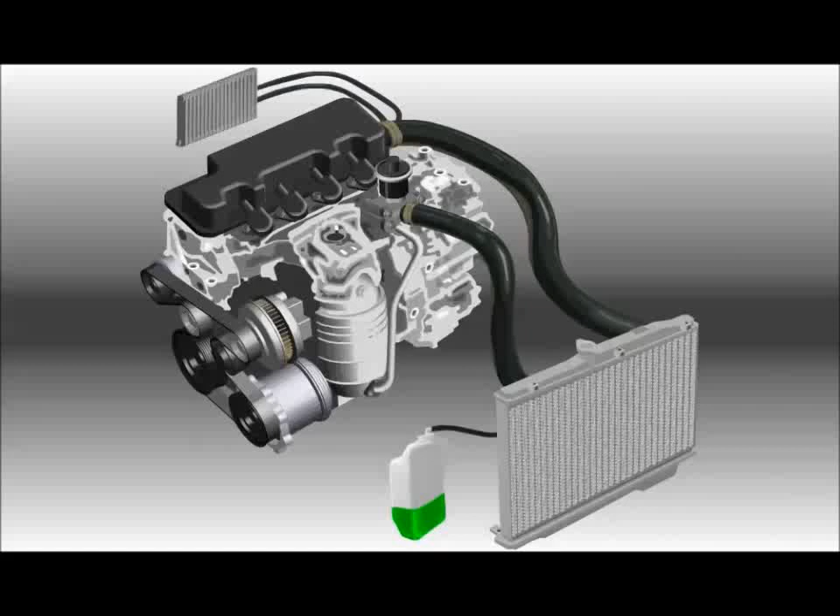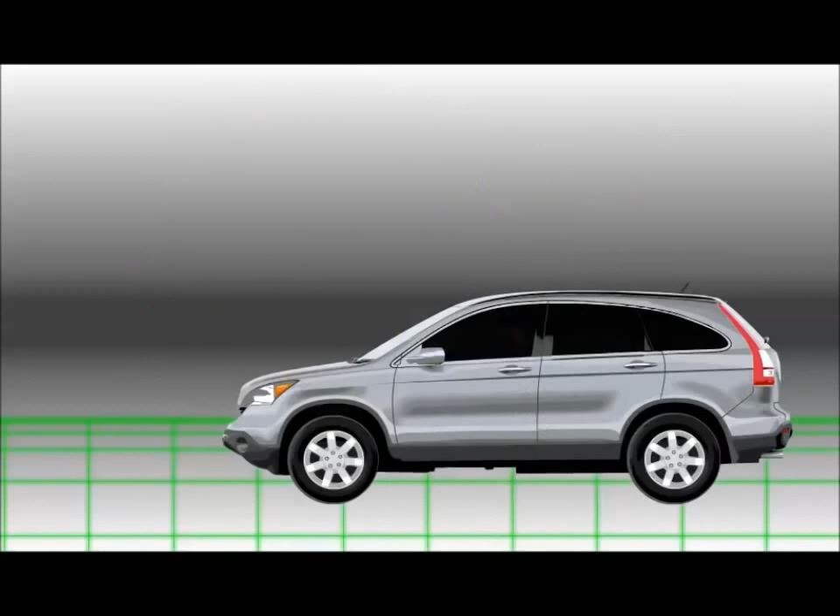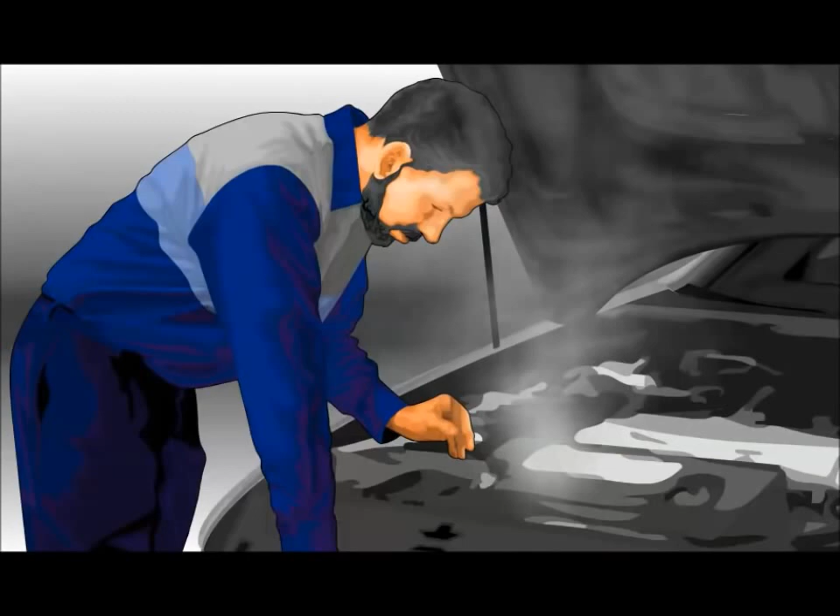A vehicle cooling system removes excess heat from the engine. The system transfers heat from the engine into the vehicle interior or the atmosphere using heat exchangers called radiators. To perform its job, the cooling system must cool the engine enough to prevent damage, while keeping the engine warm enough for efficient operation. In addition, the cooling system must work in all operating conditions, adjusting to changes in engine load, vehicle speed, and outside temperatures. Finally, the cooling system must contain increased pressures created by engine heat.

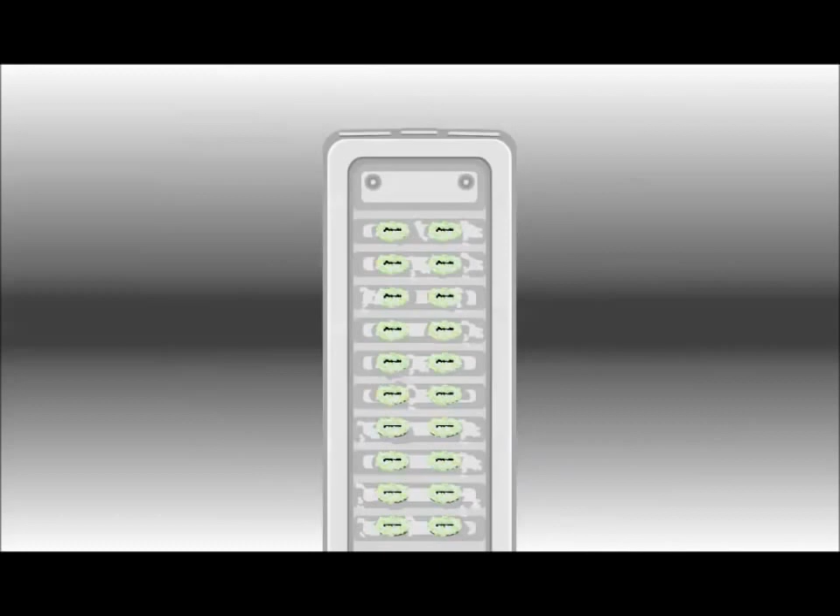The cooling system must carry heat from inside the engine to the atmosphere. The system uses a liquid called coolant to accomplish this. While our coolant contains some water, pure water makes a very poor coolant. Pure water allows damaging corrosion inside the cooling system, boils at a relatively low temperature, freezes easily, and has poor lubricating properties. To solve these problems, chemicals are mixed with water to provide the needed properties. Honda or Acura coolant prevents corrosion, lubricates the water pump seal, increases the boiling point, and lowers the freezing point.

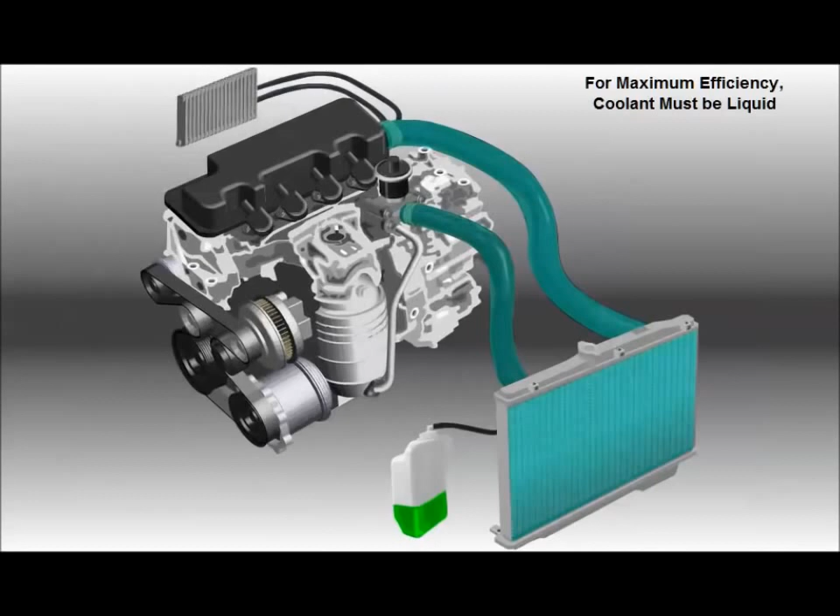Coolant can only transfer heat efficiently when liquid. If coolant boils into a vapor, cooling efficiency drops dramatically. Because of this, the cooling system operates under higher pressure to increase coolant's boiling point, maintaining cooling efficiency.

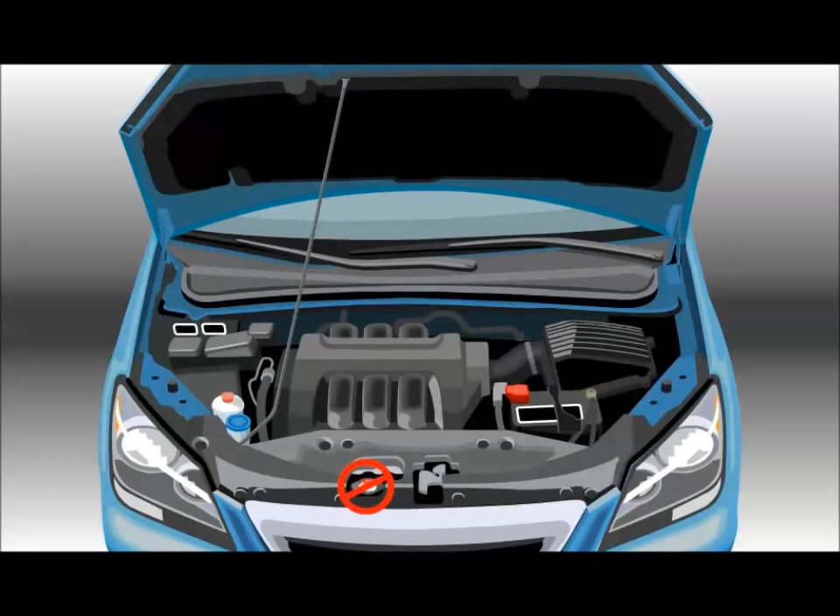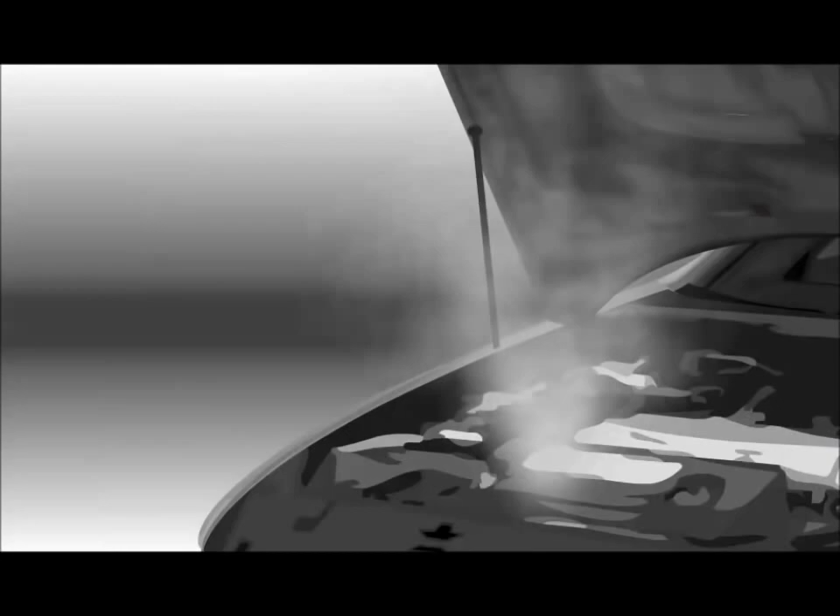Because the cooling system contains heat and pressure, do not remove the radiator cap when the cooling system is hot. Removing the cap releases system pressure. At a lower pressure, the superheated coolant flashes immediately to steam, scalding anyone in the vicinity. In addition, coolant can be a toxic substance if ingested in large enough amounts.

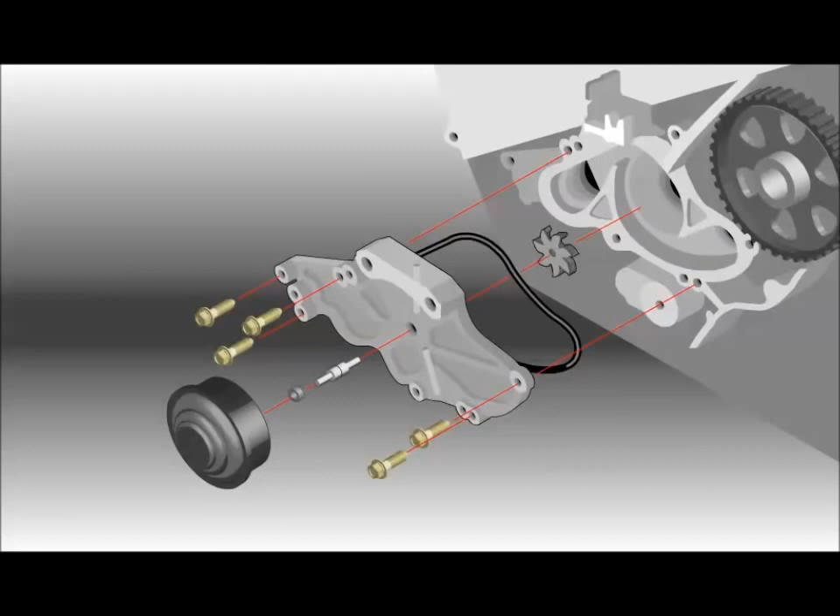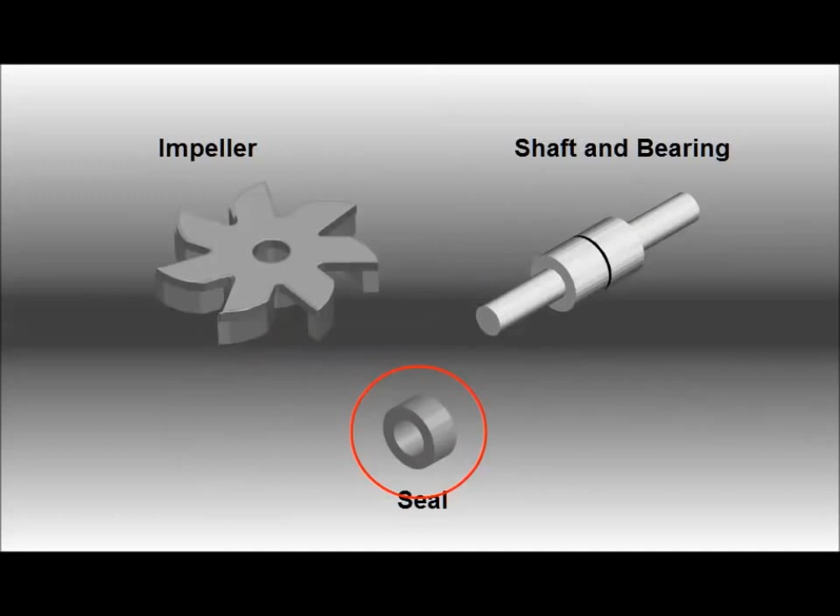Water pump uses an engine-driven impeller to draw water from the radiator and pump it into the engine water jacket. This pump may be driven by an accessory drive belt or by the camshaft timing belt. The pump includes a shaft seal between the impeller and the shaft bearings. During normal operation, this seal may allow small amounts of coolant to leak past, which can drip out of passages in the water pump housing called weep holes. This hole may normally contain a few drops, but if the pump seal fails, a steady stream of coolant flows out.

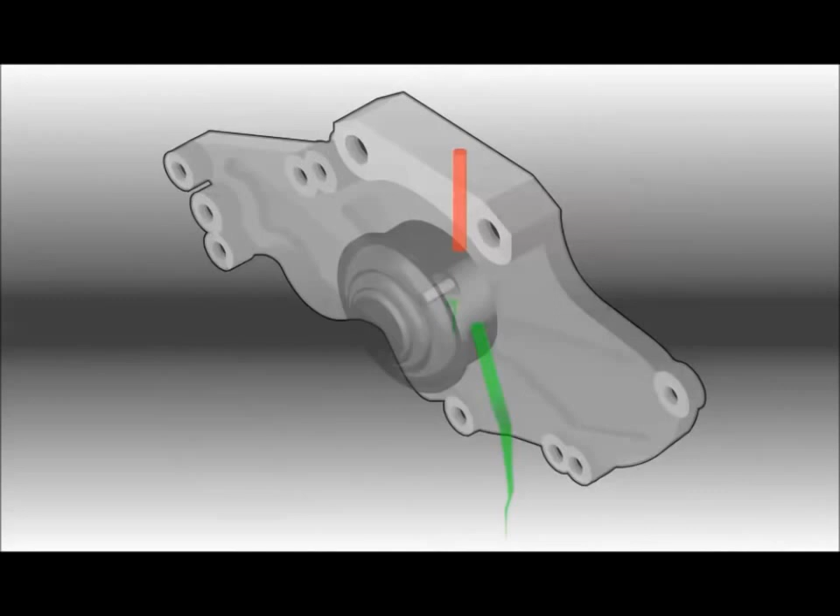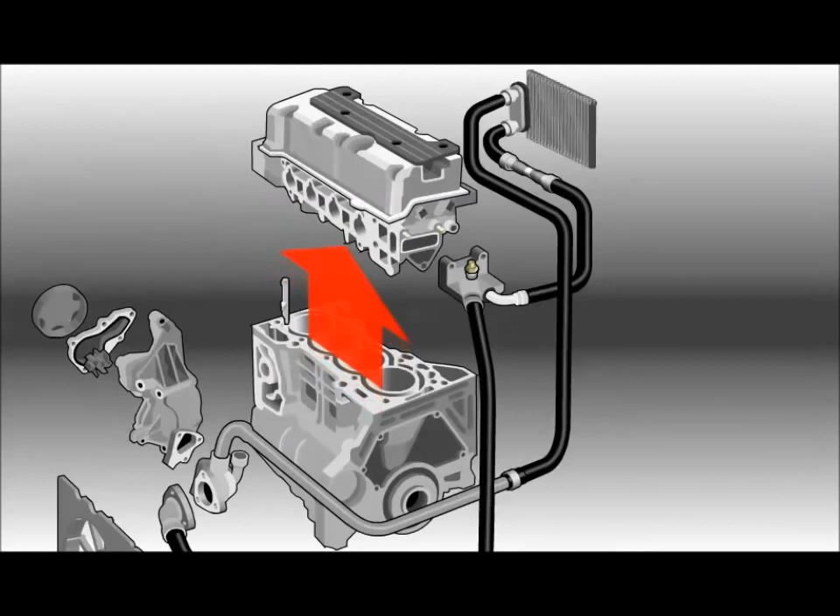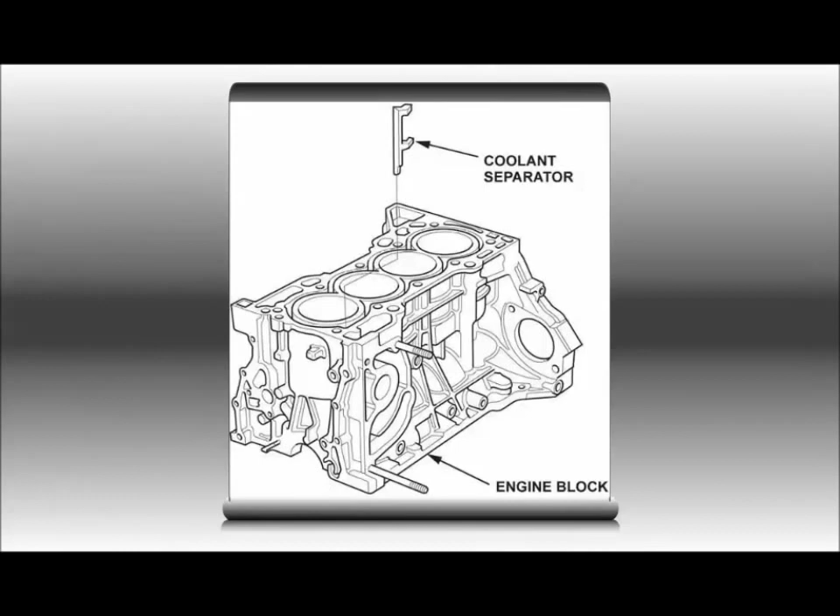Inside the engine, the water pump sends coolant into the space between the cylinder walls and engine block called the water jacket. As the coolant moves through the engine, heat from combustion transfers into the coolant, reducing combustion chamber temperature. The head gasket includes passages for coolant to flow from the water jacket into the head passages. The water jacket may also include a coolant separator to direct coolant in a specific direction. If you fail to install the coolant separator during engine work, coolant bypasses the water jacket, reducing cooling efficiency.

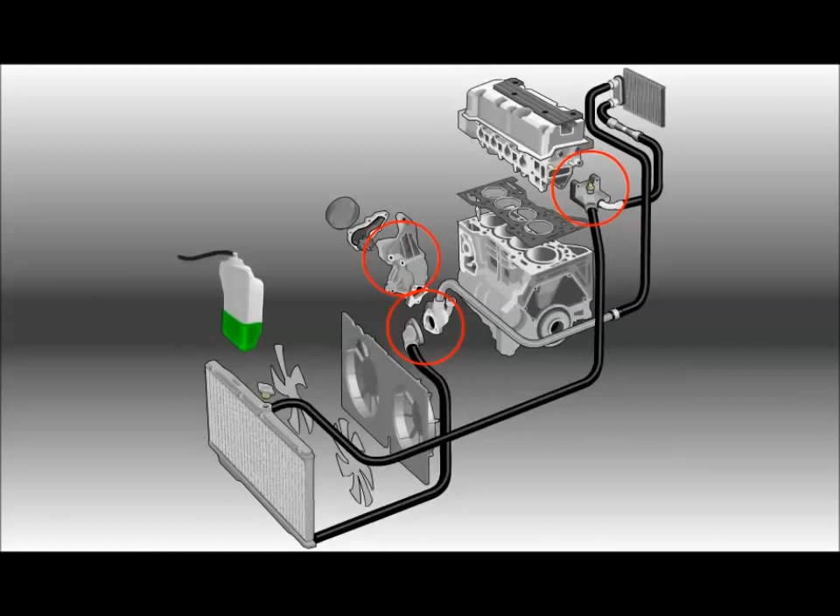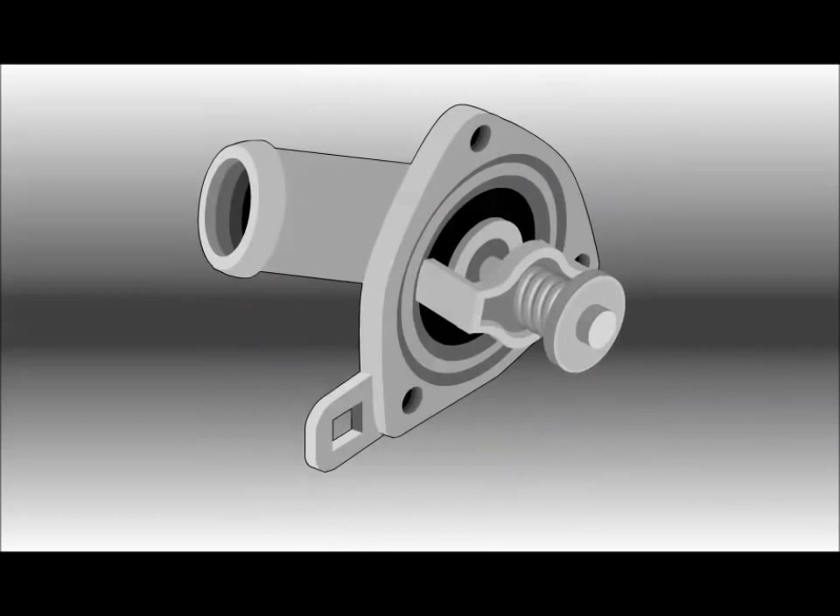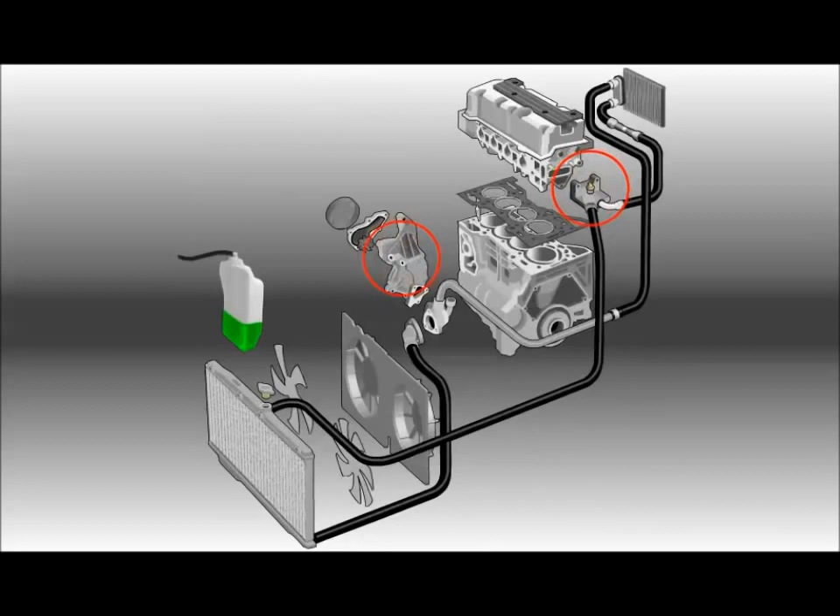The cooling system typically includes several additional engine-mounted components. To control temperature in the water jacket, a housing containing a thermostat controls coolant flow between the engine and the radiator. The thermostat is a temperature-controlled valve. When the engine is cool, the thermostat stays closed to prevent coolant flow. As the engine warms up, the thermostat opens to allow coolant flow and controls flow to maintain a target temperature. Additional engine-mounted components include external housings with several hose connections or bleed bolts at the high points of the water jacket.

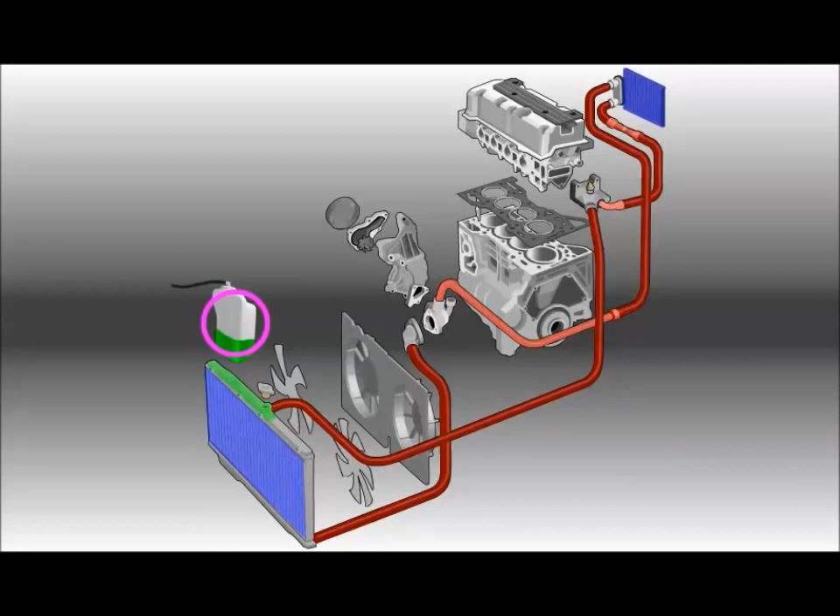Outside the engine, the cooling system uses several different components. These include hoses, heat exchangers, expansion tank, and coolant reservoir. Coolant system hoses provide a path for the coolant and use rubber and fabric construction to help isolate engine vibration from the external components. Because of this, hoses require regular inspection for wear, leaks, and damage.

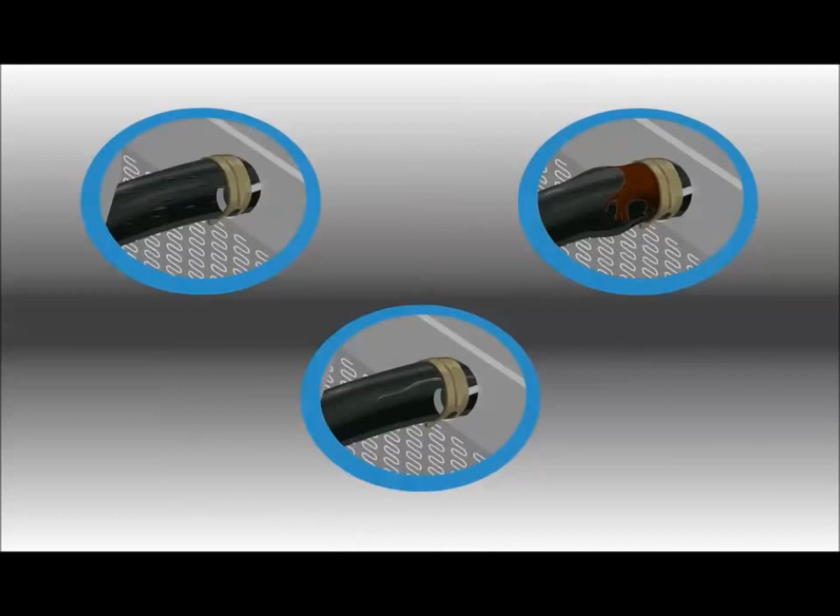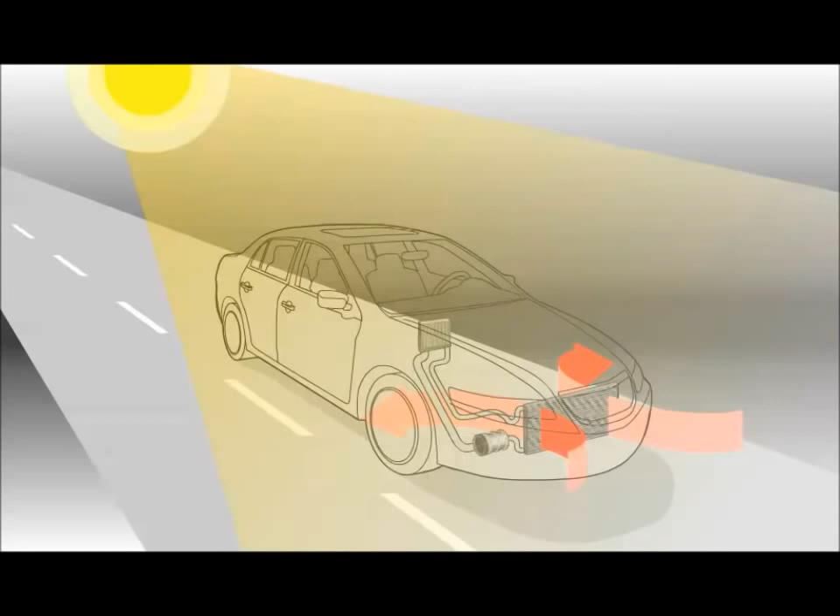The radiator and heater core both act as heat exchangers to dissipate engine heat from the coolant to the air. The radiator sends excessive heat into the outside air, while the heater core directs engine heat into the passenger compartment.

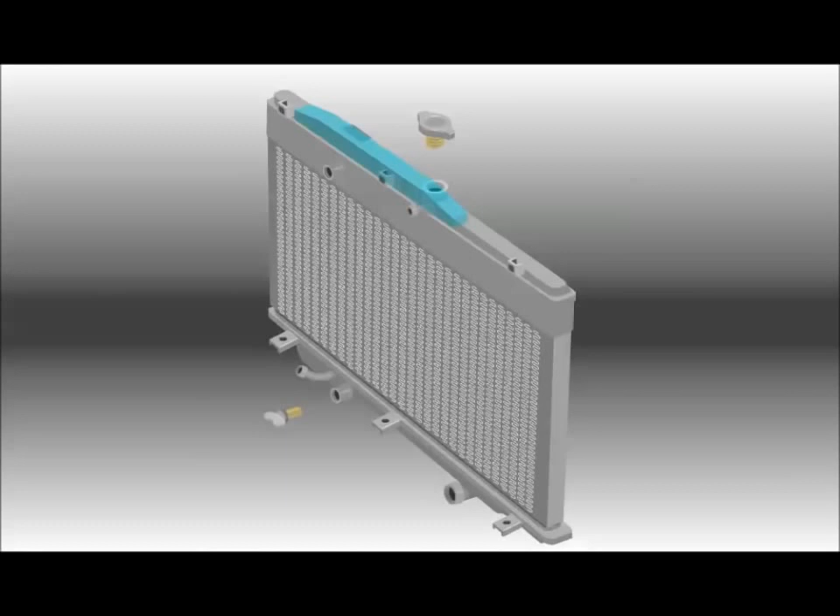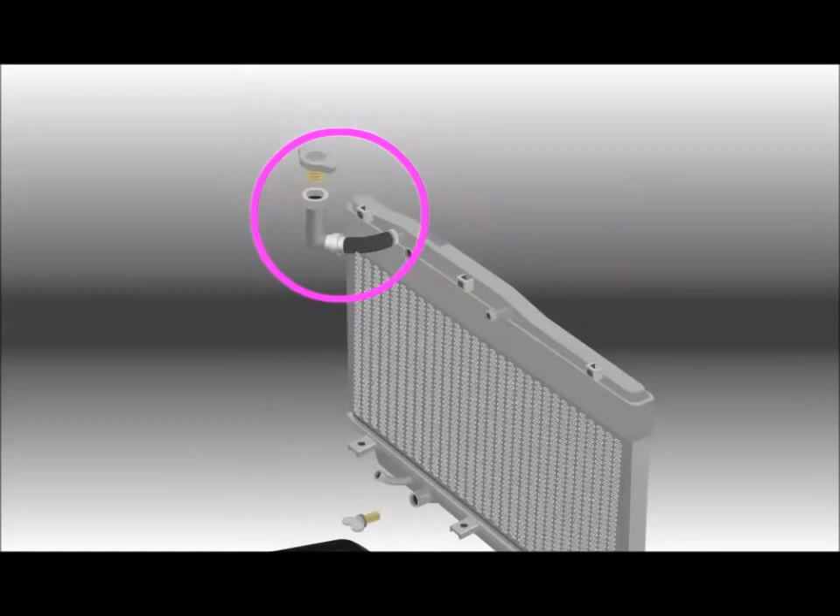The cooling system also includes an expansion space and radiator cap at the highest point. Typically, these parts are at the top of the radiator, but some vehicles use a remotely located radiator cap or include an expansion tank above the engine. Any vapor in the cooling system collects in this space.

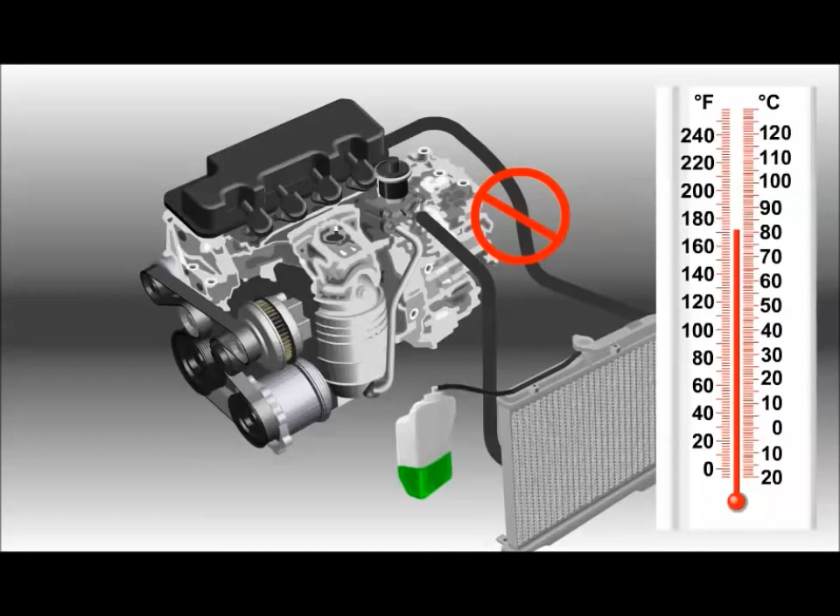During engine operation, the cap allows pressure to build in the cooling system. This increased pressure also raises the boiling point of the coolant, reducing the likelihood of steam forming in the engine. If the cooling system exceeds a preset pressure, the radiator cap vents coolant and stores it in a coolant reservoir.

The coolant remains in the reservoir until needed. If the system pressure drops below atmospheric pressure while the system cools, the cap allows coolant to return to the engine, filling any voids in the expansion space.

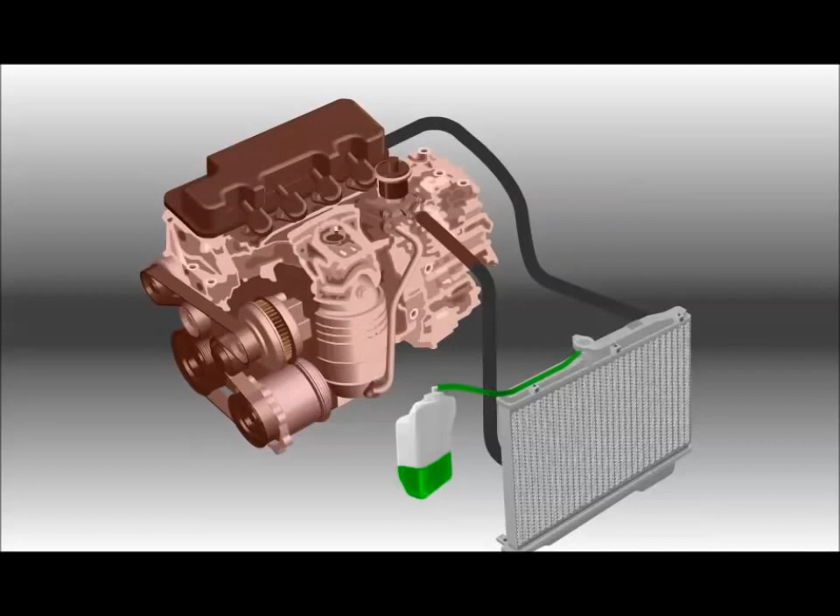The cooling system typically includes electric fans to increase airflow through the radiator at low vehicle speeds. The fan control circuit always starts the fan at high engine temperatures, but may operate the fan at other times. When the driver activates the air conditioner, the cooling fans run continuously. Also, be aware that high engine temperatures can cause the fans to run with the ignition turned off.

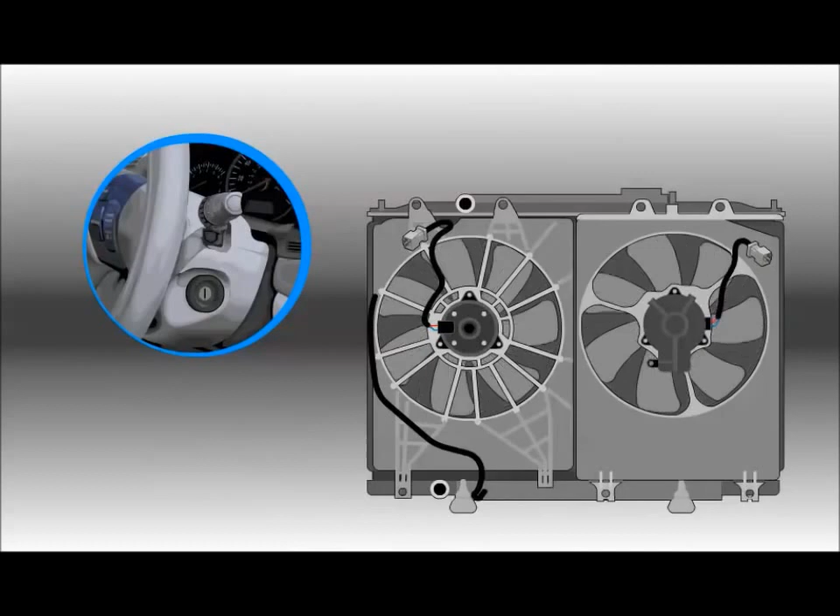During vehicle maintenance, the cooling system may require inspection or service. This includes visual checks, coolant testing, and coolant replacement.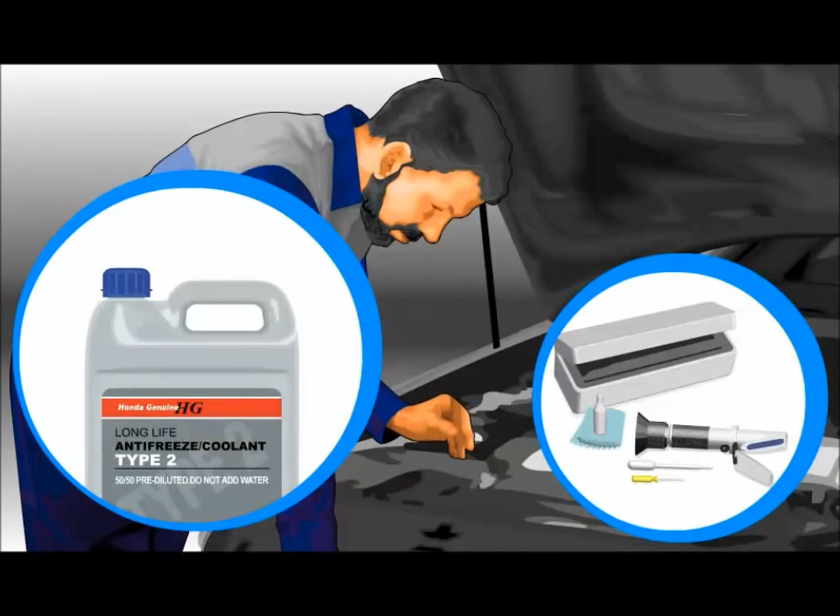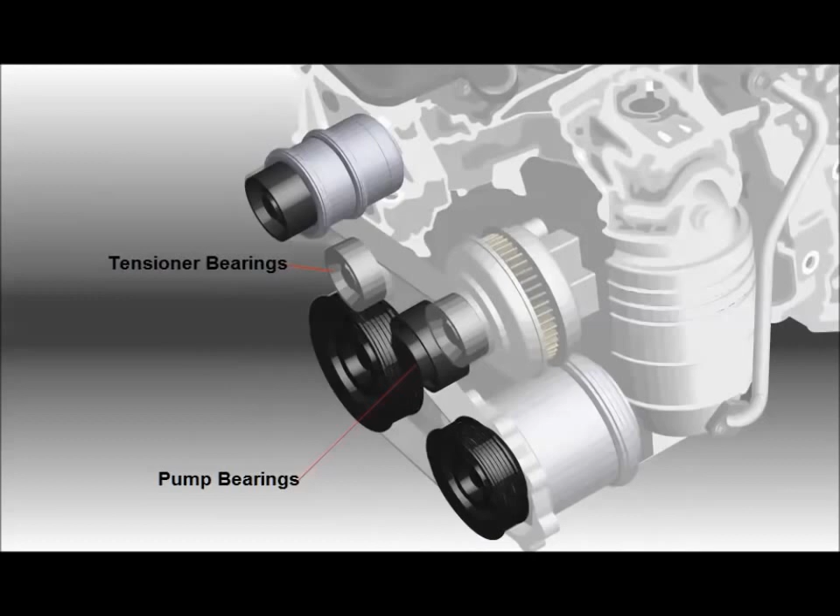During a visual inspection, check rubber hoses for bulging, deterioration, or rot. Make sure the water pump and belt tensioner bearings run straight and true. Rotate the tensioner and water pump shaft to check for roughness and rock the flange or pulley from side to side. If you feel roughness or excessive clearance, replace the worn-out component.

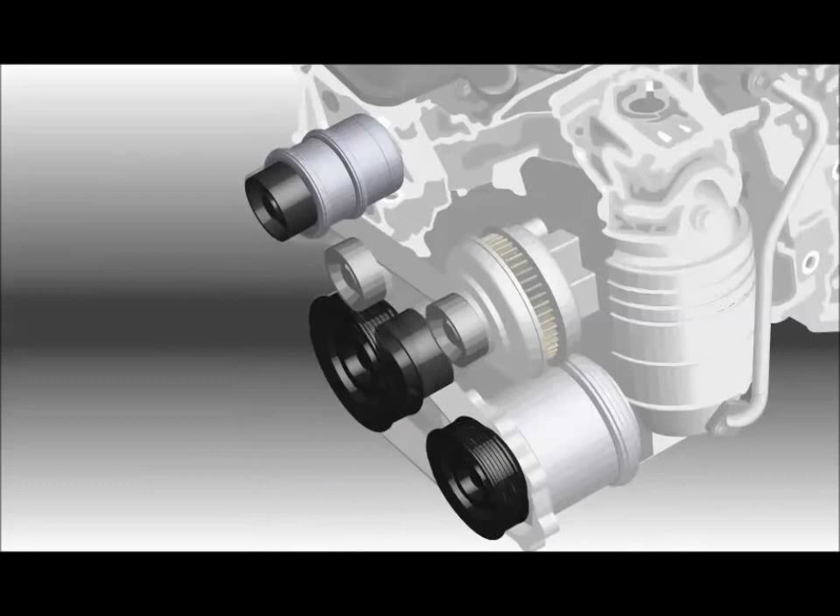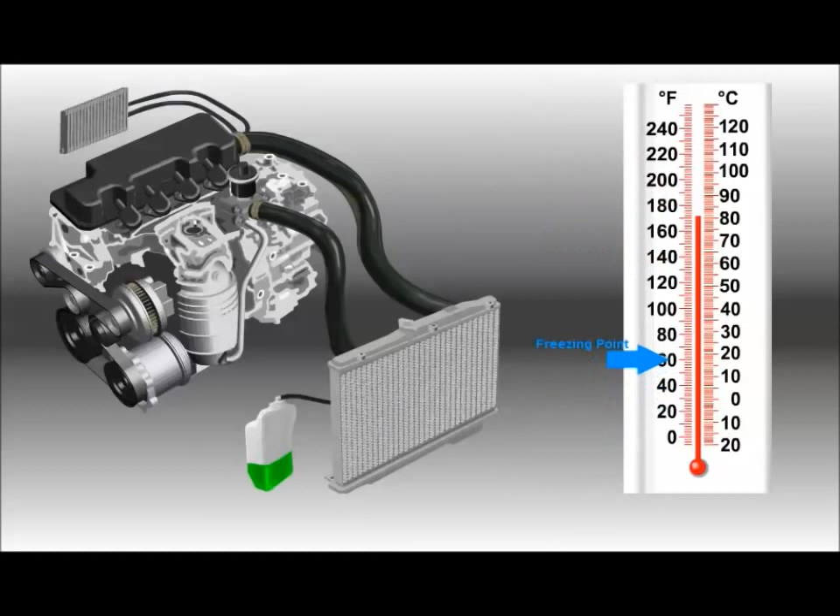During inspections, check for the proper coolant mixture. Incorrect mixture strength affects the boiling and freezing points of the coolant. Also check the coolant's age. Coolant's corrosion protection and lubrication properties both decline with time.

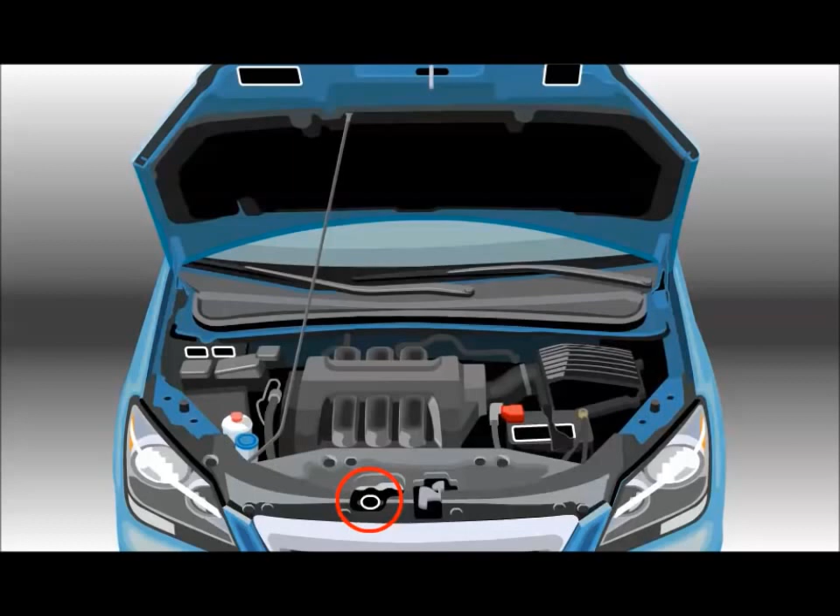If your coolant checks identify a problem, replace the coolant with our factory pre-mixed coolant. This coolant requires no additional mixing and is engineered to meet the needs of Honda vehicles.

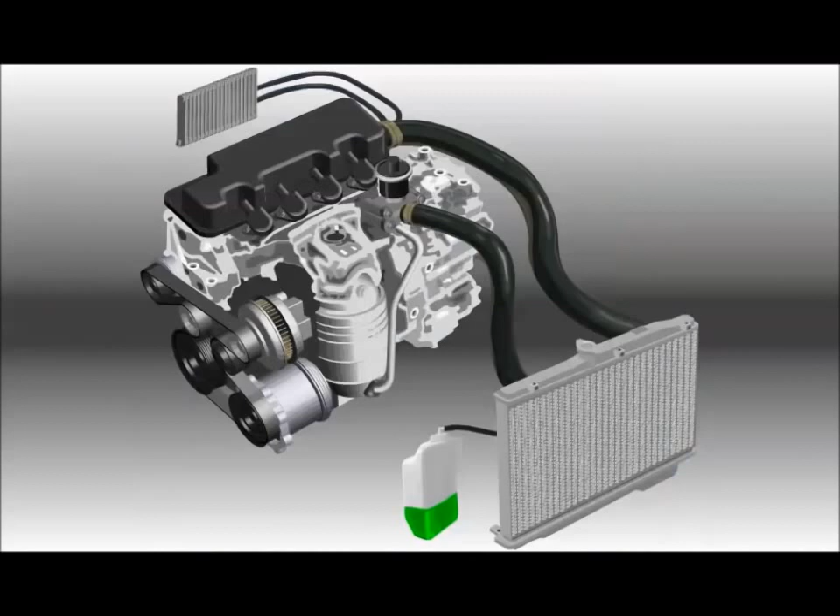If the vehicle is losing coolant, inspect the cooling system for leaks. As always, start with a visual inspection. There are 3 types of coolant leaks. First, hoses can leak at the connections or from holes. Second, components such as the water pump or radiator can leak from seals or seams. Finally, gaskets on the engine can leak due to age or corrosion.

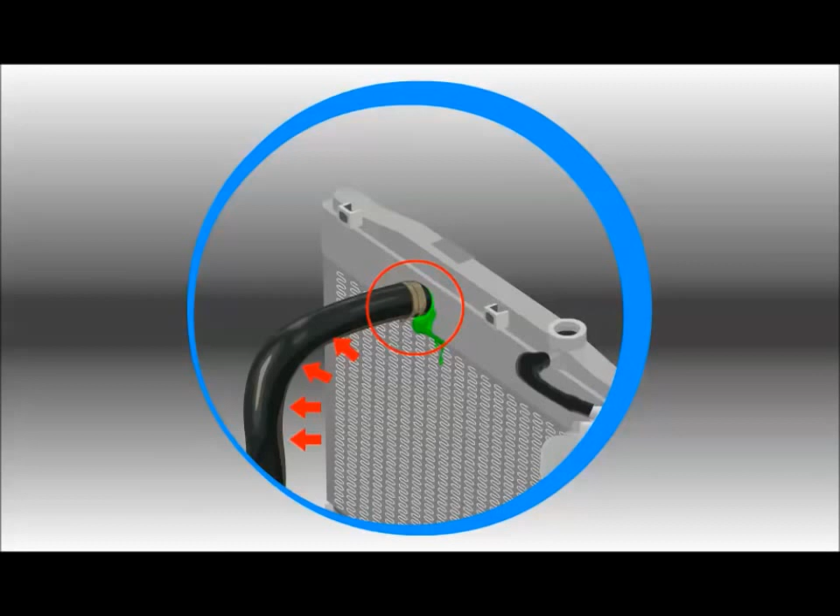Check the hose ends for drops of coolant and check the underside of the hoses for leak trails. Also look for streaks of coolant in the engine bay caused by a pinhole leak in a hose.

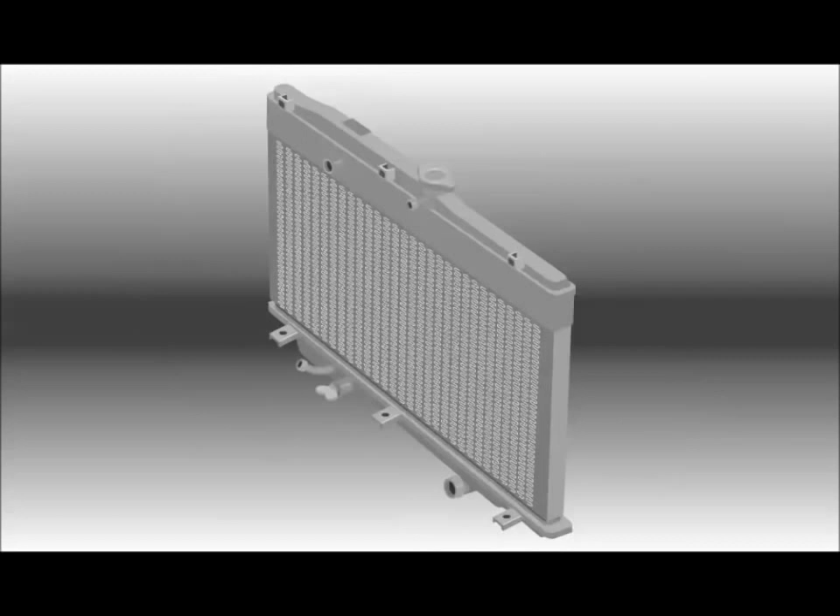Look at the water pump, radiator, and heater core for visible leaks. Check the water pump shaft and seal by looking at the weep hole for evidence of a coolant stream. When checking the radiator and heater core, check the core for wet spots and look for coolant droplets at the joints joining the tubes with the end tanks.

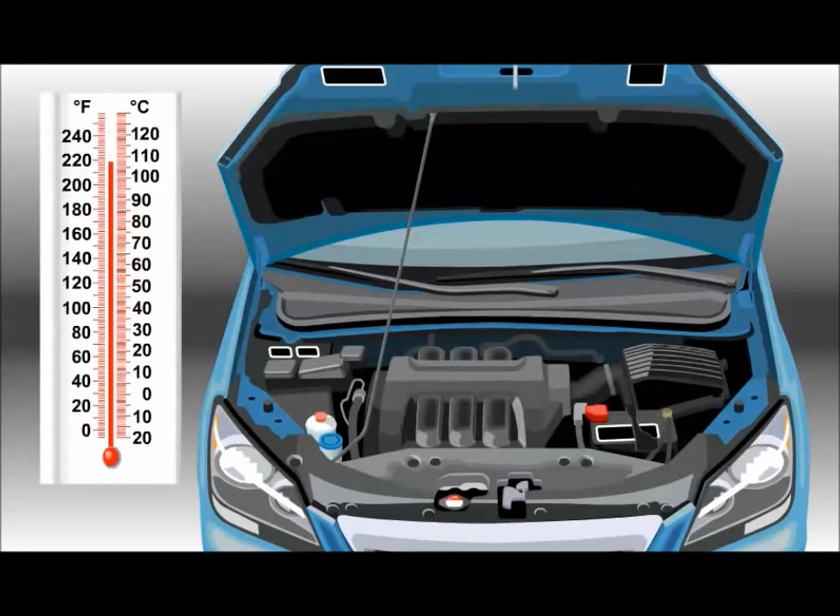Finally, check for coolant leaks at the machined surfaces of the engine. These joints typically use flat gaskets, but a few components use a rubber seal. These joints typically leak once the engine warms up and are unlikely to show leakage during a visual inspection on a cold engine. When checking for leaks on these surfaces, look for stains or discoloration at the mating surfaces during your visual inspection.

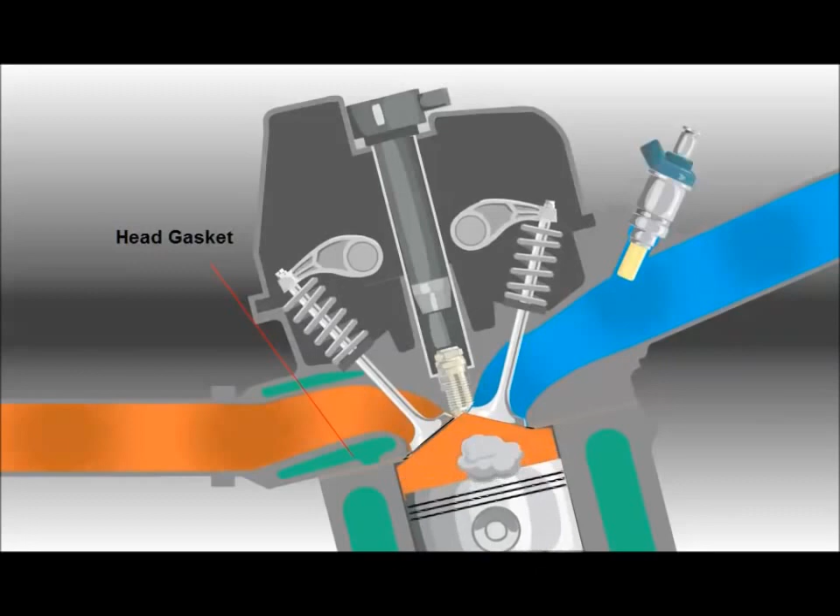The head gasket may allow coolant to leak into the combustion chamber. When this occurs, the coolant vaporizes and exits out of the tailpipe, leaving no visible coolant trail. To check for this fault, remove the radiator cap and check for bubbles in the coolant with the engine running. With no pressure in the cooling system, a leaking head gasket forces combustion gases into the water jacket, and the gases appear in the radiator as small bubbles.

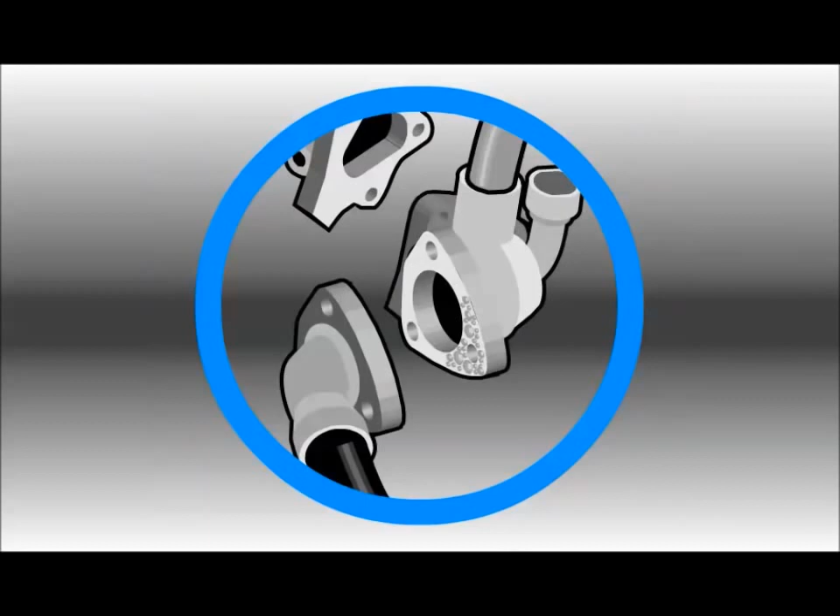If you find a gasket leak, be sure to inspect the gasket surfaces for corrosion damage or warpage after disassembly. If you identify a damaged gasket surface, replace the component.

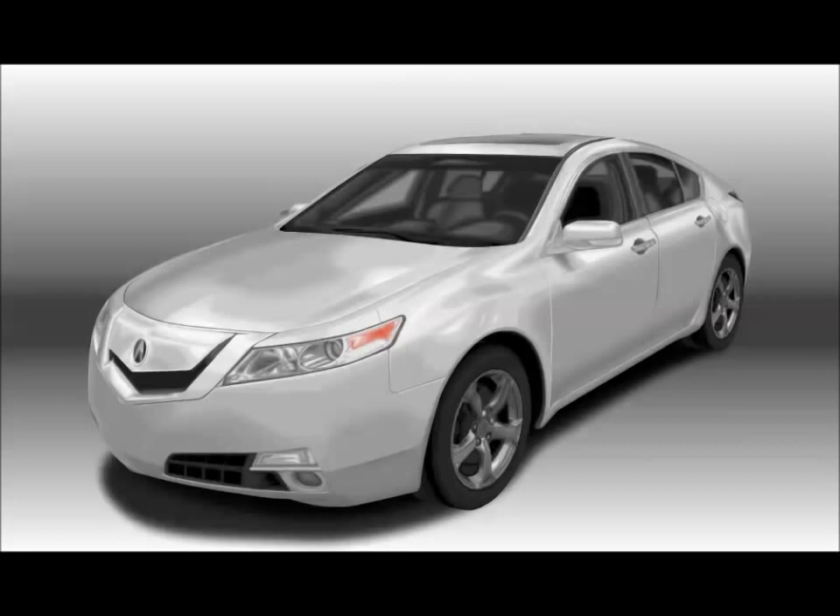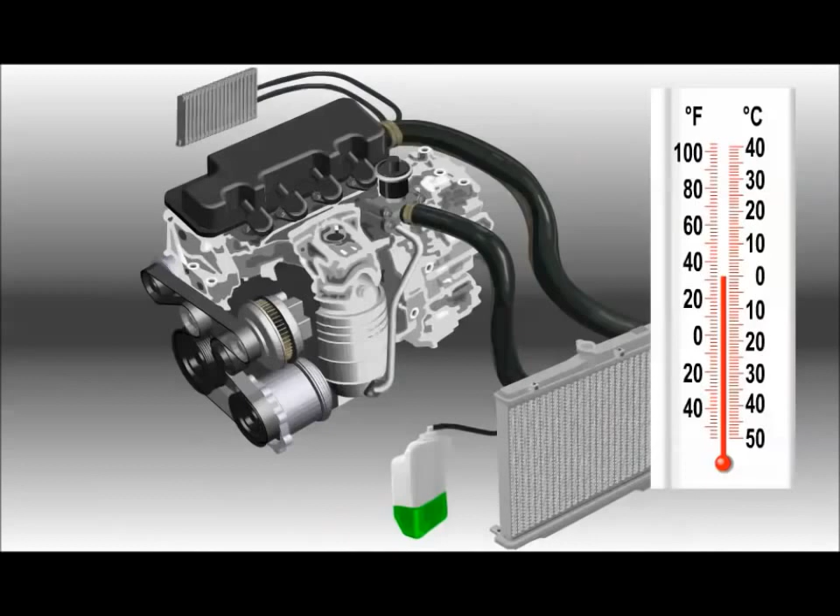If you don't find the leak using a visual inspection, you can pressurize the cooling system with a pressure tester. This forces bubbles or coolant out of the coolant leak. To use the tester, start with a cold cooling system and do not start the engine. Running the engine with the tester attached will overpressurize the cooling system and lead to damage.

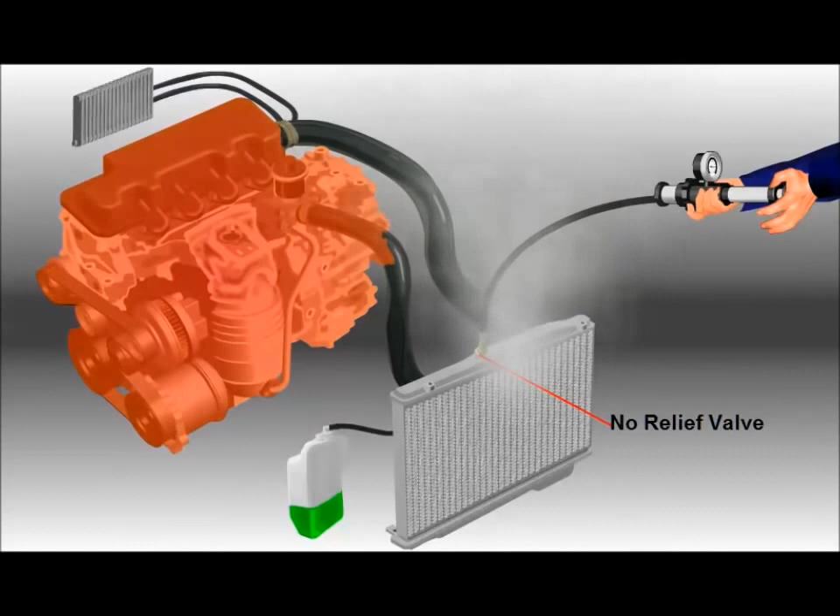Once you've pressurized the system, recheck all components for coolant leaks. If no leaks are visible on the outside of the engine, remove each spark plug and check for coolant inside the cylinder.

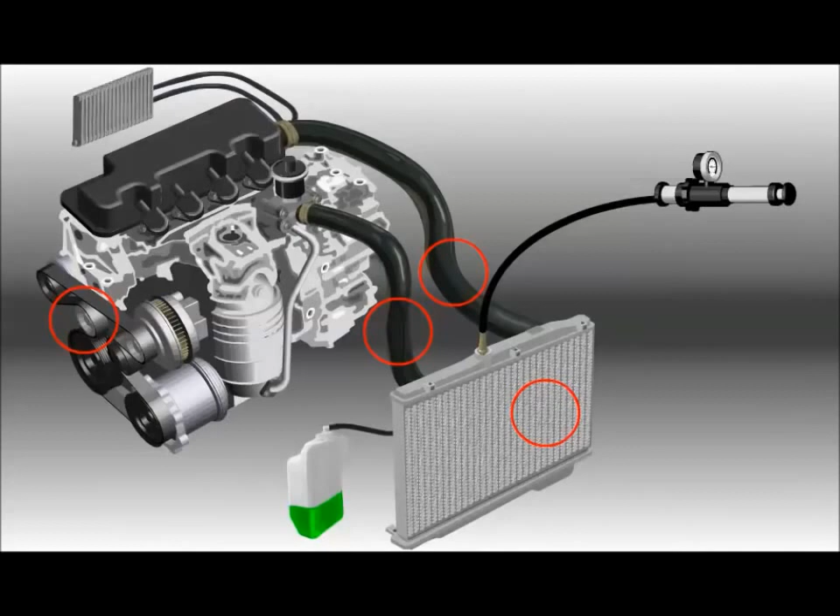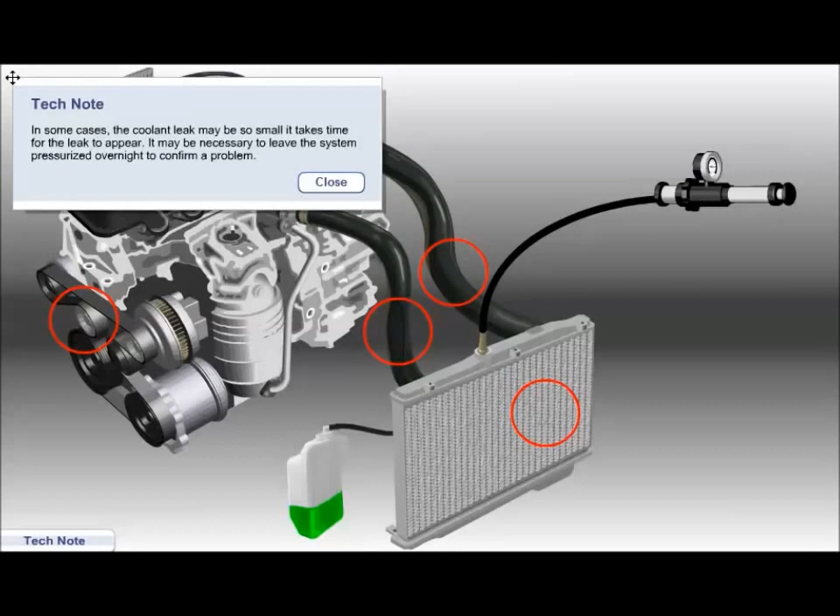Also check the radiator cap using a test adapter. Visually check the radiator cap gasket and filler neck for damage, then check cap performance using a test adapter. A cap that doesn't meet its rated pressure can release too much coolant and lead to engine damage.

When the vehicle does not leak coolant but still overheats, several components may be at fault. Check cooling fan function, confirm the thermostat opens, and test radiator performance.

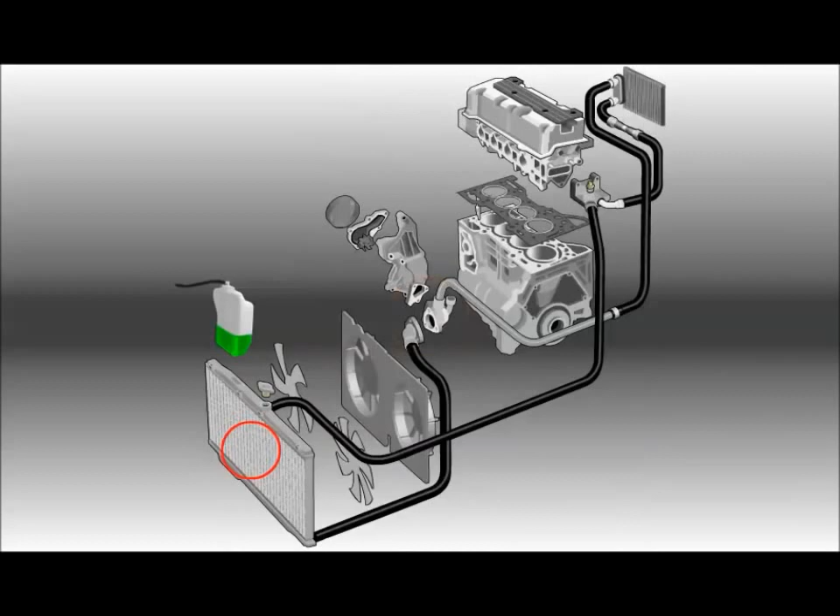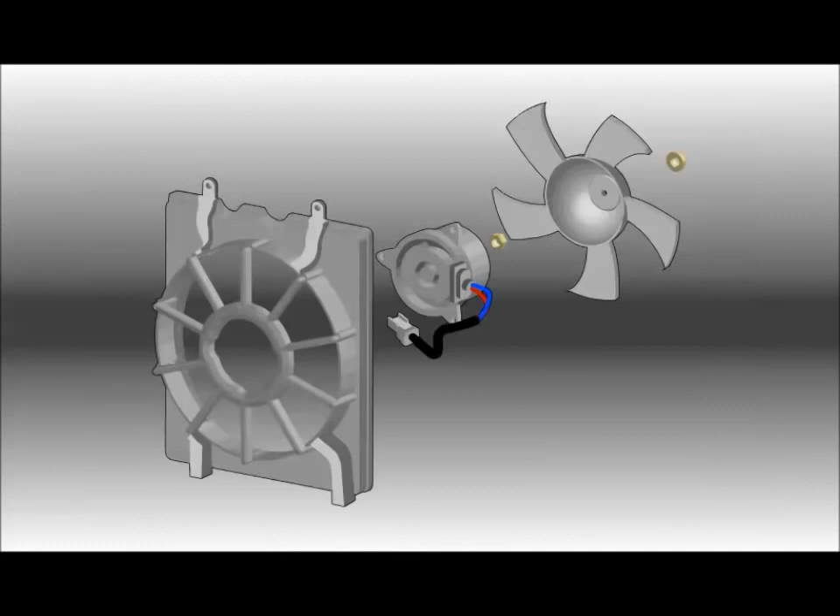To check the fans on cars with an air conditioning compressor, start the engine and press the AC button or set the climate control to the lowest temperature. With the air conditioning on, the cooling fans should turn on. If the fans do not run, check for a problem with the fan circuit or fan motors. If the fans do run, the circuit is good. Turn off the air conditioning or climate control and go to the next step.

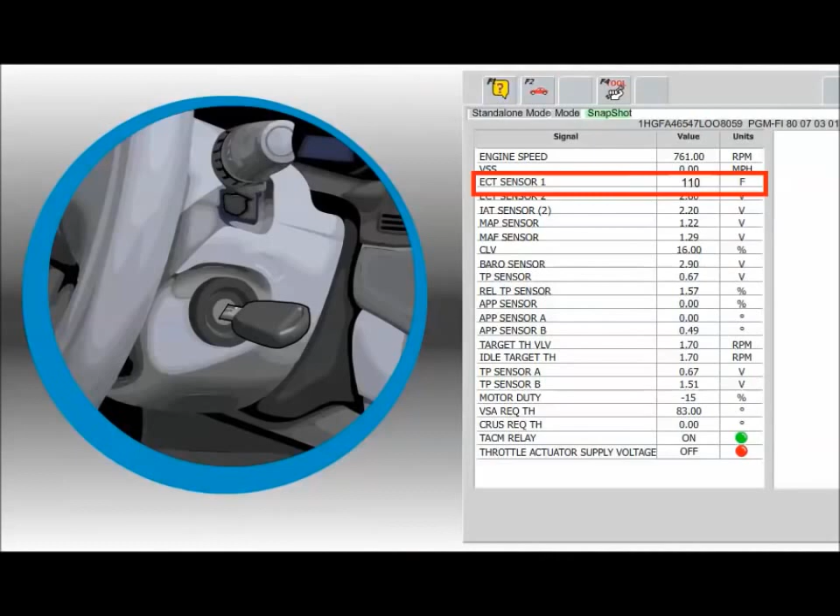When the coolant in the water jacket reaches operating temperature, the thermostat should send warm coolant to the radiator. With the engine running, connect a scan tool and check coolant temperature. When the engine temperature approaches 180 degrees, coolant flow should warm the upper radiator hose.

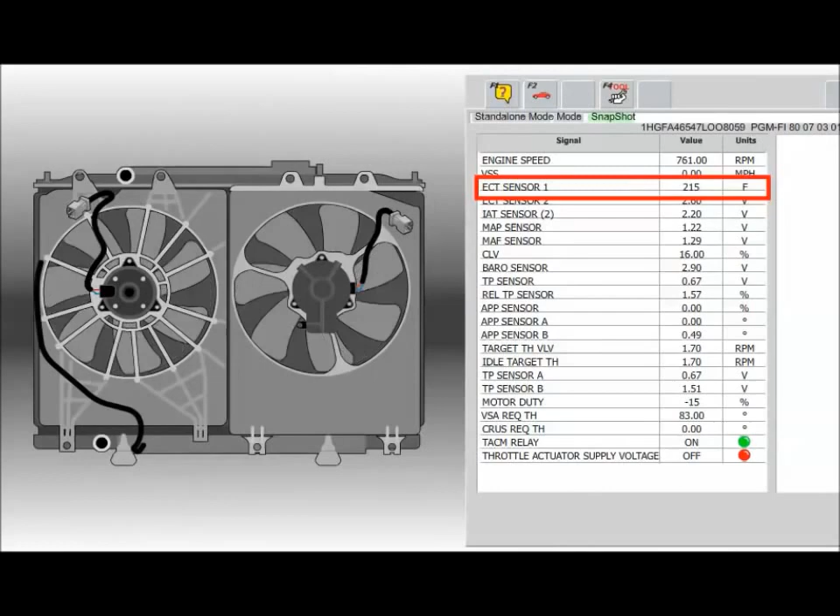If coolant flows, move on to the final fan check. If the engine temperature exceeds 210 degrees and there's no coolant flow, check the thermostat using the service manual procedure. If the thermostat opens normally, make sure the fans run to cool the engine. If the engine reaches 210 degrees and the fans do not run, check the fan control circuit.

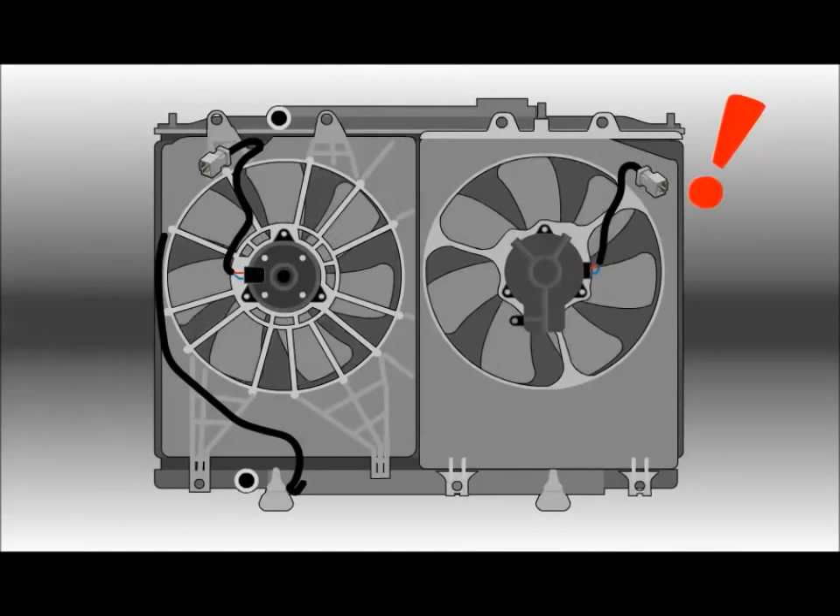If the fans run but the engine temperature remains high, make sure both fans blow air toward the rear of the car. If a fan blows in the wrong direction, the fan harness is defective. To repair this problem, reverse the leads in the fan connector.

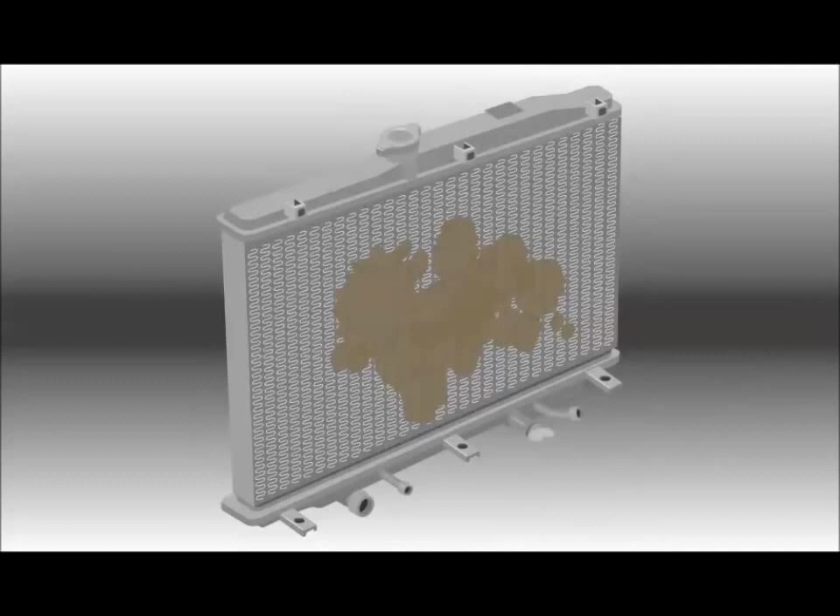If the thermostat and cooling fans are working correctly, check the radiator performance. Using an infrared thermometer, measure the temperature difference between the upper and lower hose. There should be a minimum difference of 15 degrees Fahrenheit between the two hoses. If there's insufficient temperature change between the hoses, check the front of the radiator for blockage caused by dirt, insects, or debris. Finally, check the radiator for internal problems such as plugged tubes.

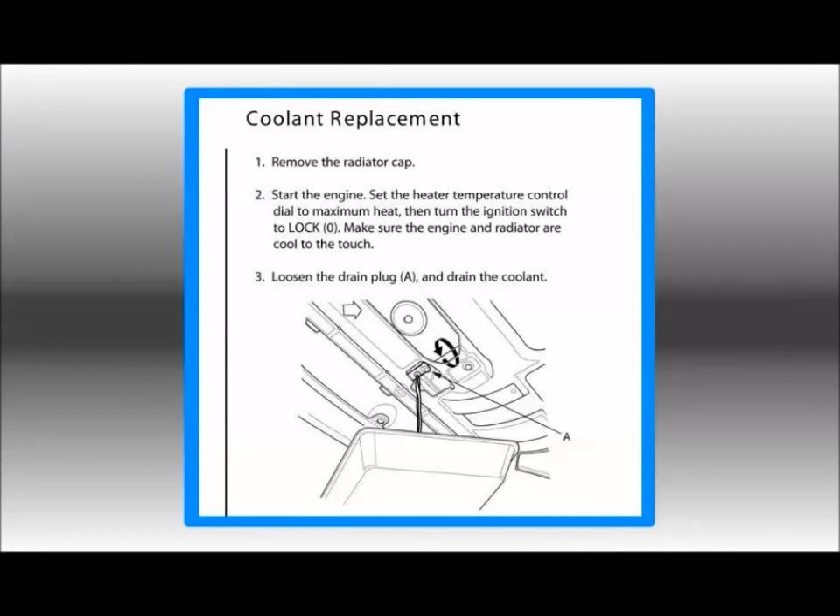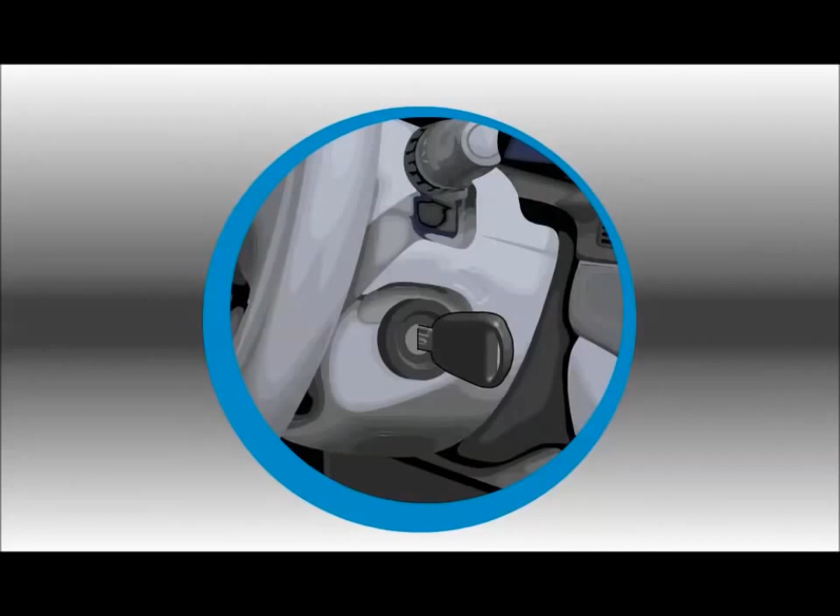When replacing the coolant, be sure to follow all service manual procedures. This helps guarantee you've drained the coolant from all portions of the cooling system. Many service manuals ask you to start by turning on the ignition and setting the temperature control to high. This opens the heater control valve to make sure coolant drains out of the heater core.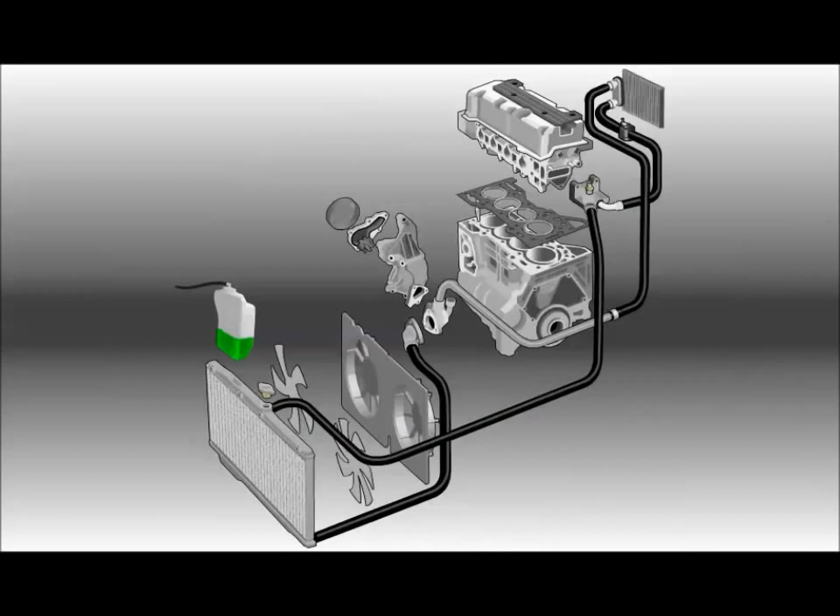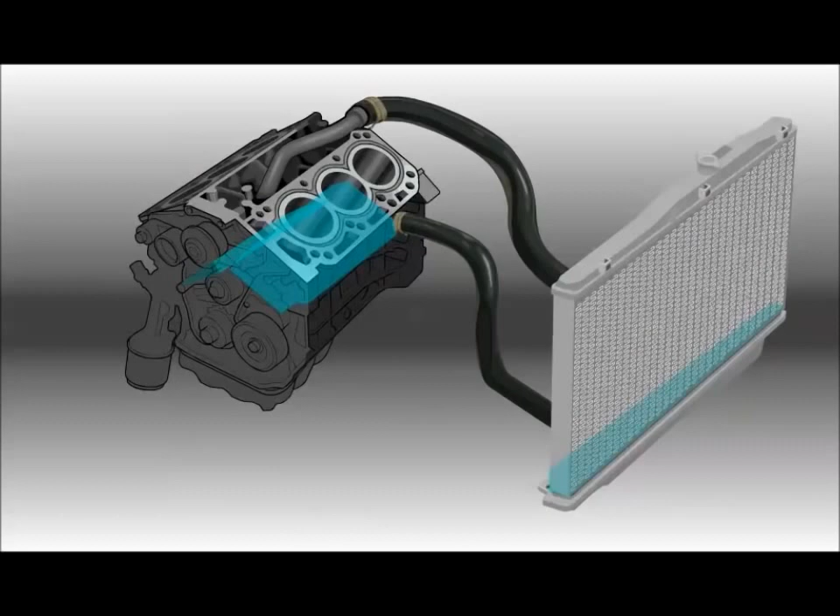On some vehicles, removing the radiator drain bolt only drains coolant from the radiator. For these vehicles, the service manual asks you to open drain plugs on the engine block, which drains coolant from the remainder of the cooling system. Finally, the manual instructs you to remove the coolant reservoir, flip it over, and drain the last of the coolant in the system.

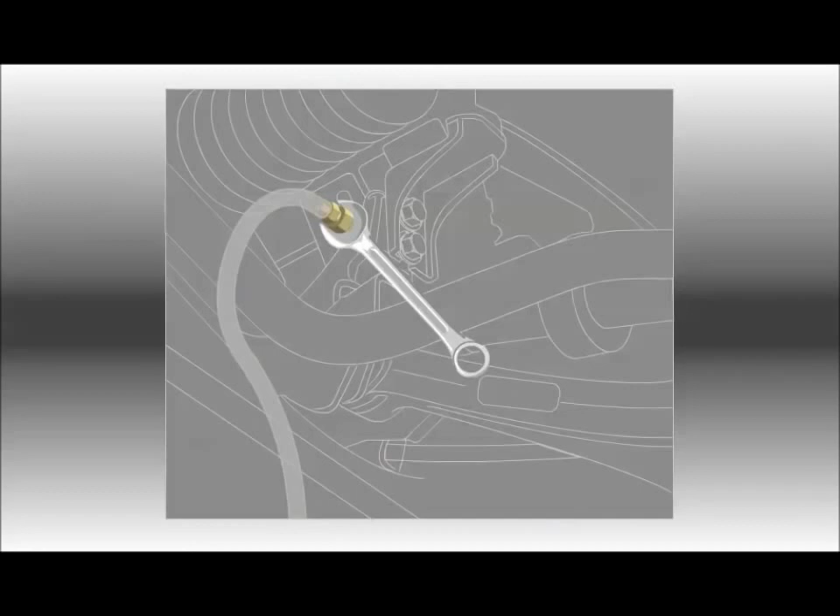Once you've drained the coolant, prepare to refill the cooling system. Replace and tighten the drain bolts and remount the coolant reservoir. Refill the reservoir until the coolant reaches the max full line.

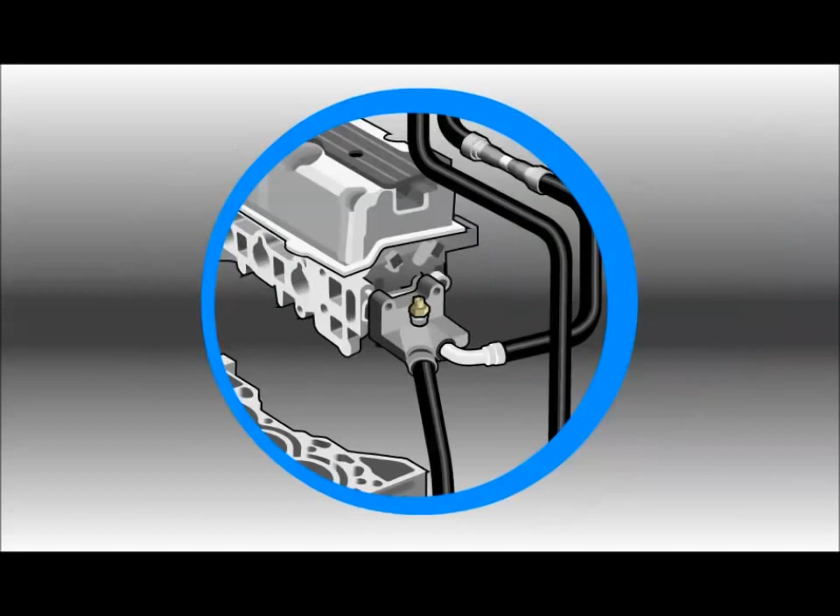On some vehicles, the cooling system layout prevents air from making its way to the expansion space. To solve this problem, service manuals instruct you to open bleed valves at the high points of the cooling system, which allows air to escape.

When working on cars with bleed valves, open the valves before adding any coolant. Fill the cooling system until coolant reaches each bleed valve. When coolant begins to flow out the bleed valve opening, close the valve.

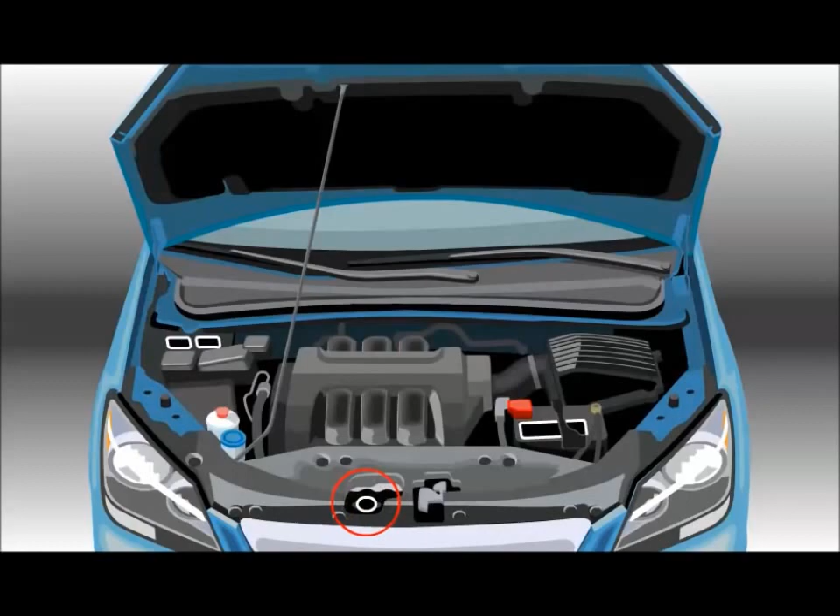After filling the cooling system, you may have to open the thermostat to burp or move any remaining air pockets into the expansion space. To burp the cooling system, remove the radiator cap and warm the engine up until the cooling fan turns on and off twice. Add enough coolant to fill any void in the radiator.

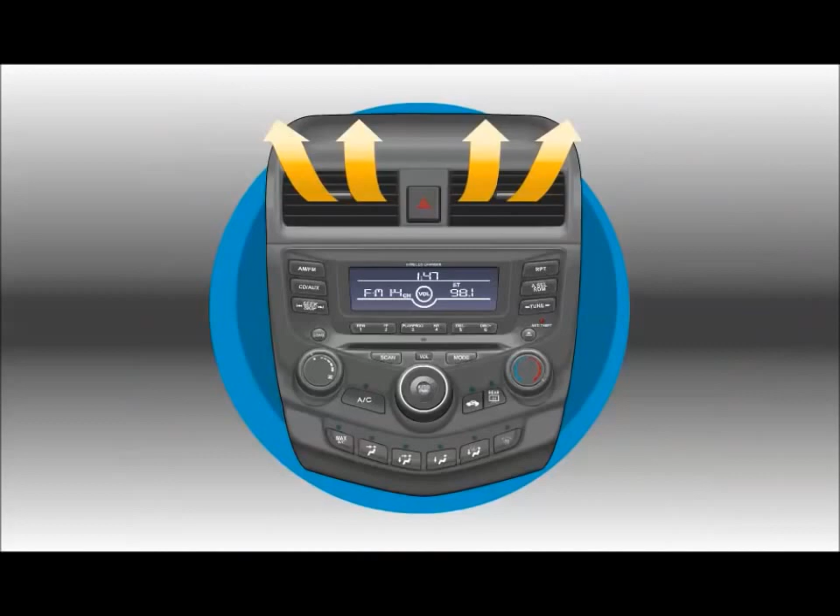Once the system is full, idle the engine to make sure it remains cool. Also see if the heater blows warm air. If the car fails these checks, an air bubble may be preventing coolant flow to all parts of the system.

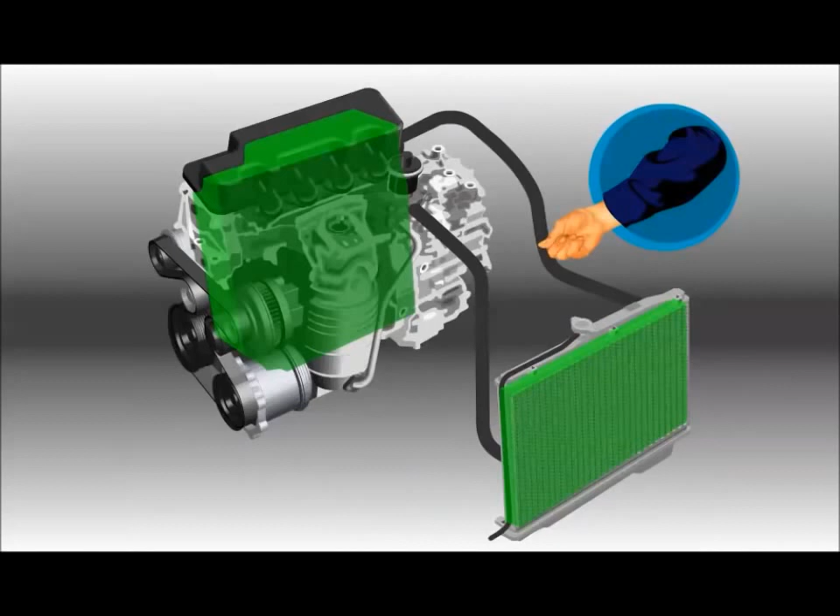After the engine cools back down, check all the bleed valves for air. In some cases, squeezing the upper radiator hose or lifting the front of the car may help move air bubbles into the expansion space.

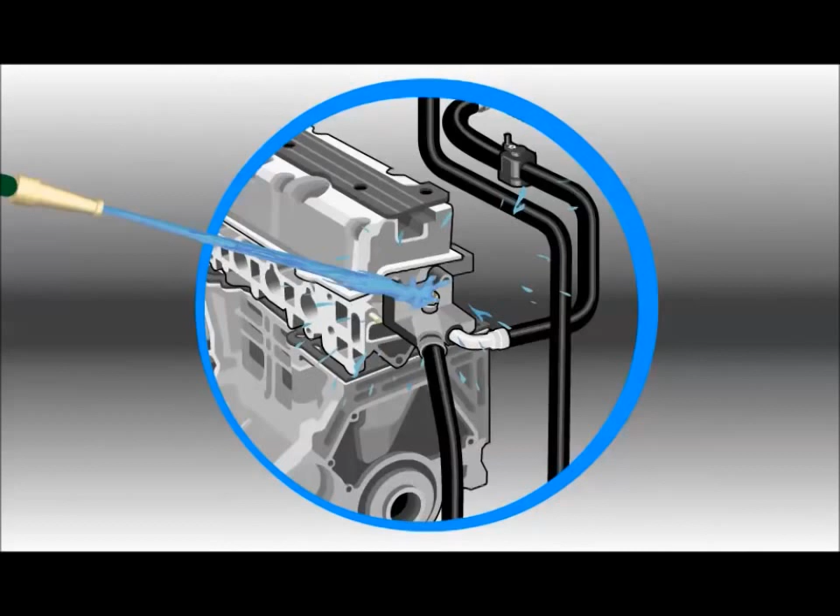Once the engine cools properly, finish the job by flushing off any spilled coolant and, if needed, resetting the maintenance minder. Once you've completed these steps, you've completed the refill and the car is ready to return to service.